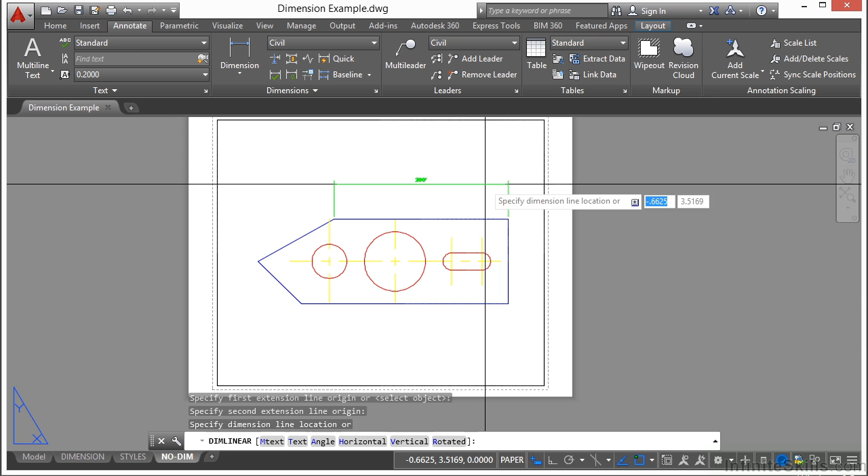So right now with it set to 2, if I draw a dimension here, any type of dimension, and then I go to select it, you see it's a dimension object. If I open up my properties palette and I select it, it tells me it's a rotated dimension. That's the type of dimension it is.

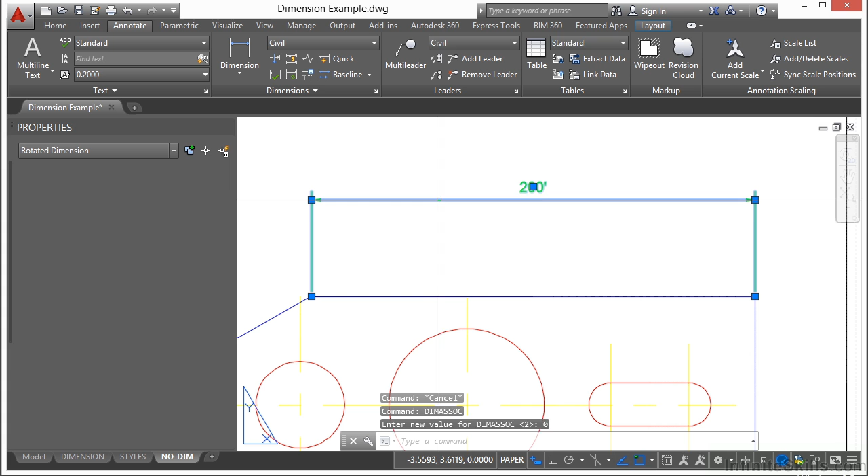Now, if I go to my DIMASSOC value and I turn it to 0, of course, this dimension will stay the same. It was already drawn in. But if I create a new dimension, I get a lot more options. This is the very old setting for dimensions that we used to use before associative dimensions. But it's still here. It's a legacy command. And when you go to use it, it asks for a lot more information, like the value.

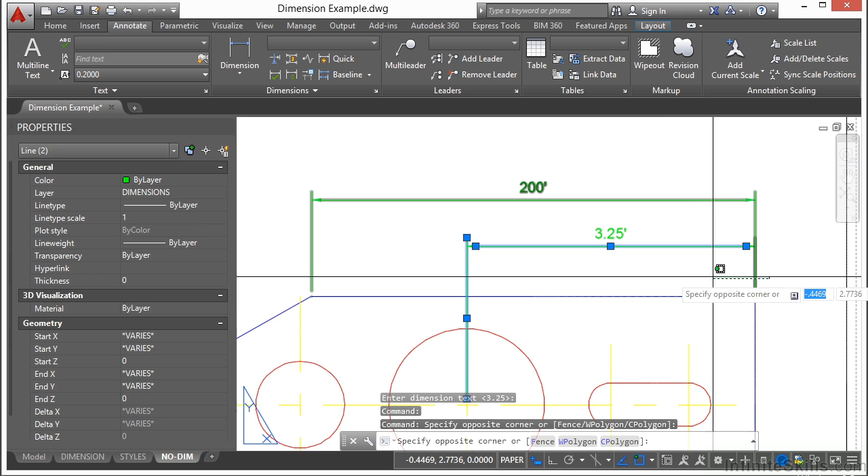Once you type it in, you can see here, this is not a dimension. This is just a series of lines. It's also a text object. And we have an arrowhead here that is really just a solid. So I can't easily change or edit it like I can here. You don't want to use this unless there's something absolutely strange about your dimension that you can't get to work right. So that's what that setting does.

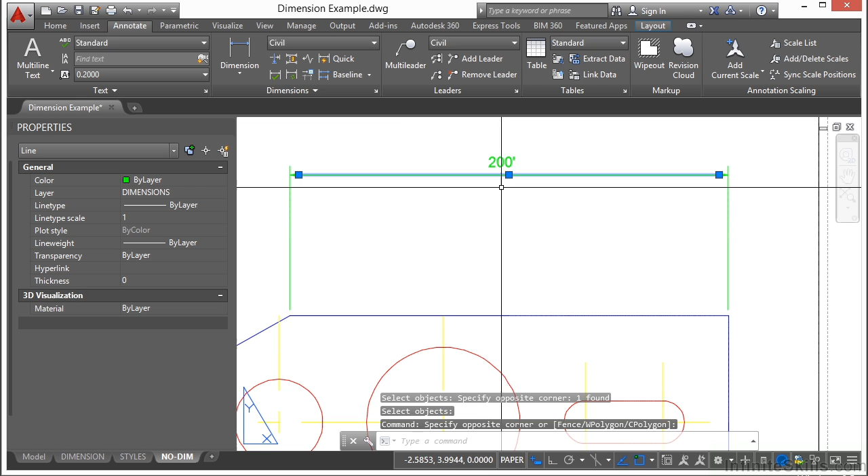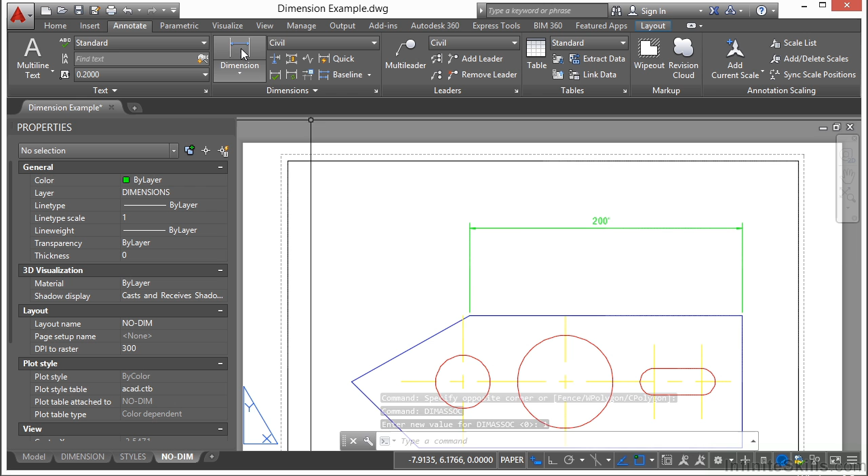Now, if you explode a dimension, that's kind of the same result. It just turns it into a bunch of lines, text, and solids. Now, there's a difference between setting 1 and setting 2. A lot of times you'll find older files set to number 1. Number 1 turns them back into a dimension object. So now when I create this dimension and select it, it's a dimension object, same as if I select the old one. I'm going to erase these to get them out of the way.

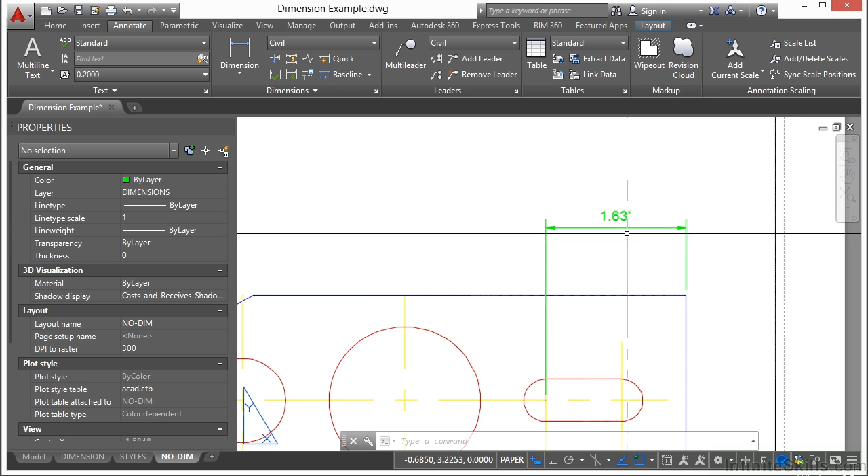But this is a setting where you need to manually set your scale. As you can see here, this dimension is 1.63 units. If I set my DIMASSOC setting to 2 and dimension the exact same spot, you'll see I'm getting a different value. Setting 2 associates your dimension insert points to the object in model space that you pick while you're dimensioning in paper space. Setting 1 doesn't do that. It takes the absolute true length of what you're actually measuring in whatever space you're in, be it model or paper space.

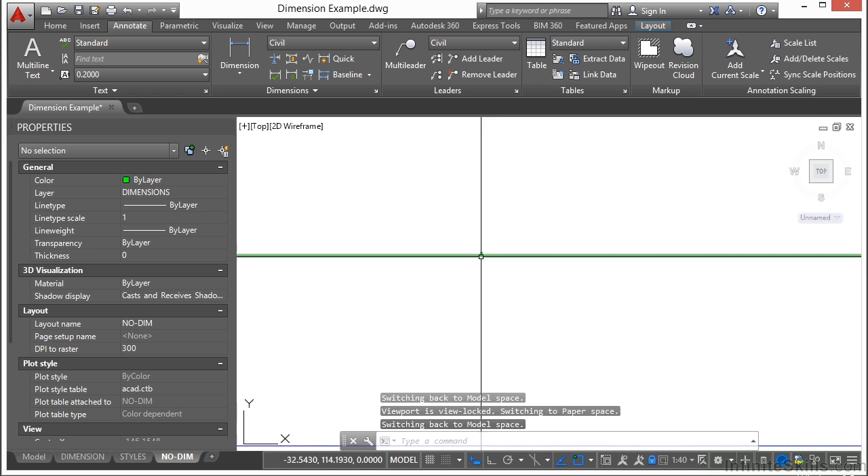So if I double click inside this viewport to activate it, change my DIMASSOC setting to 1, and dimension this, first of all, my dimension is not to scale, so it's not showing up right. But as I zoom in, I get the proper length, 65 feet. Same as in here. Setting 2 allows you to work in paper space. It measures the true distance involved, not the viewport scaling. That means you can make one dimension style regardless of the scales used.

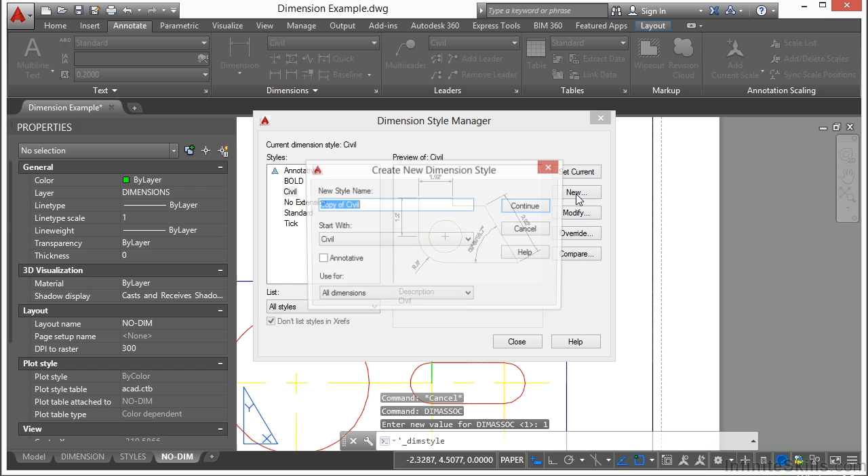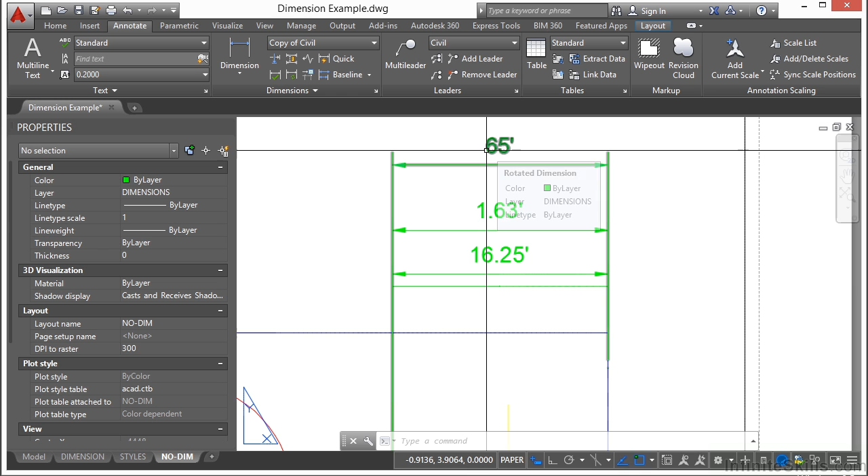So if I'm using the DIMASSOC setting of 1, in order for this to scale properly, I have to go into my Style Manager and set up the scale of my drawing right here. So if I change this to a scale factor of 10, set that one current, and make a dimension here, it scales up the value it's measuring by a factor of 10. So you can see here, this is 1 to 1, this is 1 to 10, and this is a true value based on the viewport scale.

Setting 2 is easier because if I have multiple viewports at different scales, which you will often have, especially on architectural or mechanical drawings, I don't have to set that up. I can just go with it. Also, the setting of 2 works everywhere. It works in paper space and in model space. Some people prefer to dimension in model space, some in paper space, and sometimes you may need to do both. I don't suggest that, but sometimes it happens. Setting it to 2 means there's less work for you to do.

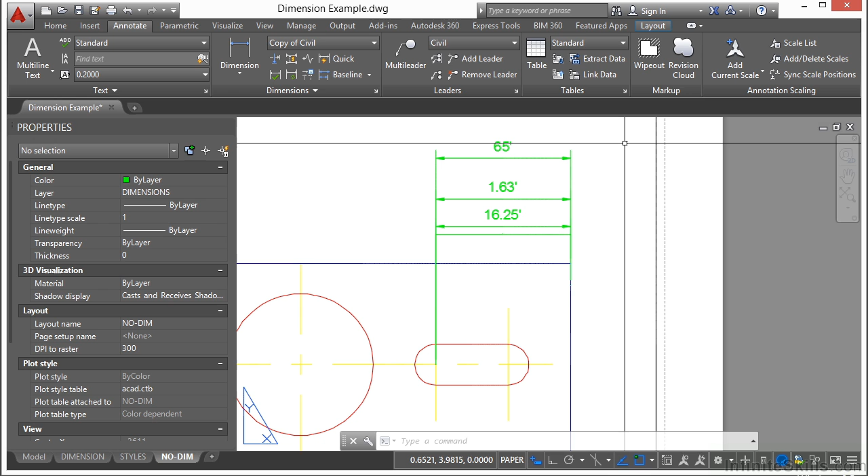The settings of 0 and 1 are legacy settings that are still there because Autodesk never gets rid of old commands or system variables. They bury them deep, but they keep them in, and that's the legacy thing you might come across from time to time. Just set it to 2 and everything will work fine. So if you get a drawing from somebody and it's not measuring properly when you do your dimensions, check that setting. Also check the scale factor setting in the dimension styles to see if that's doing something crazy, and keep an eye on that if it's not looking right.